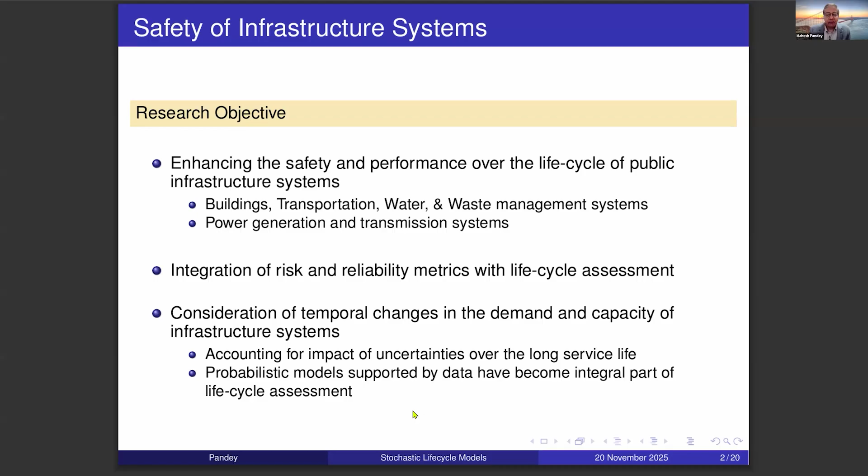Data is always, as you know, an important element in any assessment involving probability and statistics, both in the design stage and maintenance stage. We use these probabilistic models and methods which are calibrated by real life data. So two steps are there: in the initial design, setting the requirements for initial design, developing codes and standards, we use reliability based methods, which are very common in civil engineering systems of all sorts now. And we need data regarding the service loads and material properties and interactions and so on.

More importantly, in the long life infrastructure system, we also now look at the vulnerability to degradation processes. What can go wrong over the lifetime. Condition monitoring provides the data. So how do we synthesize this data in the assessment and support the inspection and maintenance planning decision? And life cycle cost optimization is also a conventional tool nowadays to find the right strategy.

So in summary, what I wish to say is that probabilistic modeling and statistical methods are natural tools for dealing with this problem of safety and functionality of infrastructure system. And I always remind the researchers and the user that it's an information intensive process. I mean, it's not that we can do in a casual sense.

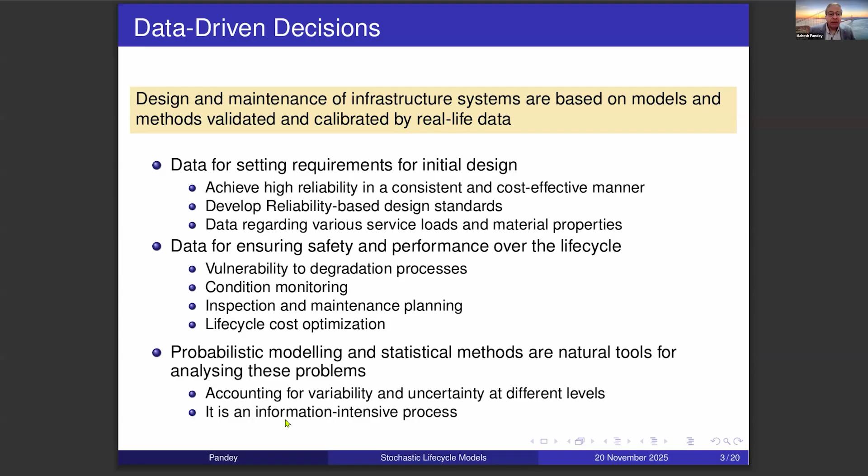So a basis for any, you can say, the skeleton or the backbone of a life cycle assessment, at least the kind of research we do, is a stochastic reliability analysis model. And what I thought is just give you a conceptual flavor of it. The time is limited to go into all the details.

And on occasions, these loads could increase, demand could exceed the capacity, and then these interactions basically would lead to so-called damage and failure events. And we want to estimate the expected losses resulting from these events, so to speak. And of course, these models are calibrated with the available data and expert assessment. Once we set the baseline, then we could approach to optimize inspection and maintenance as a way to mitigate.

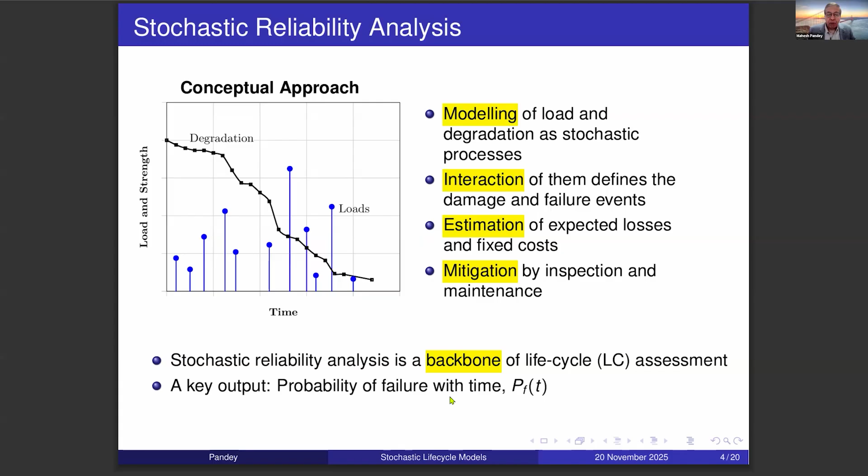So in summary, basically, I need this type of analysis which gives me a probability of failure over time for different modes of failures. It's not for single mode, different modes, different limit states, so to speak. So this is kind of the basic schematic of the method here.

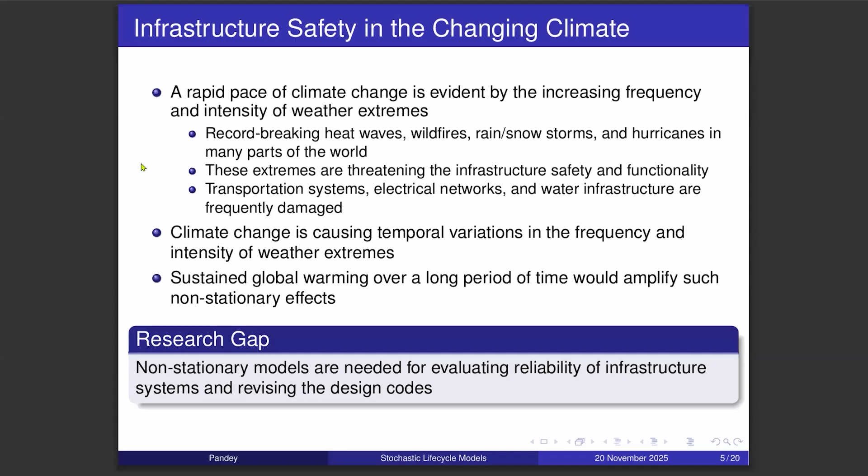Then the angle that I wish to present here in the research is on the climate change. And that is the concern also in Canada, where the climate change is at an accelerated pace as compared to rest of the world. And these changes are evident now by increasing frequency and intensity of extremes. It's a common headline nowadays in the newspaper and media. You hear about record-breaking heat waves in Canada now, rain and snowstorms and hurricanes and atmospheric river.

And of course, all these events are challenging the infrastructure safety and functionality. And in the front line, you have the transportation system, electrical networks, water infrastructure, and we hear the news about these systems being frequently damaged and disrupted. So as an engineer, what we make a note is that the climate change is causing temporal variations in frequency and intensity of weather extremes, and the sustained global warming will continue to amplify these effects. So key research gap is the non-stationarity.

All the existing design codes and standards implicitly assume that we're dealing with the stationary climate. So all the load models that we use are essentially stationary processes. So the research gap that we identified is that non-stationary models are needed for evaluating reliability of infrastructure systems, and that work should also be able to support revising the design codes. So this is the angle that we are pursuing in the research in Waterloo at the moment.

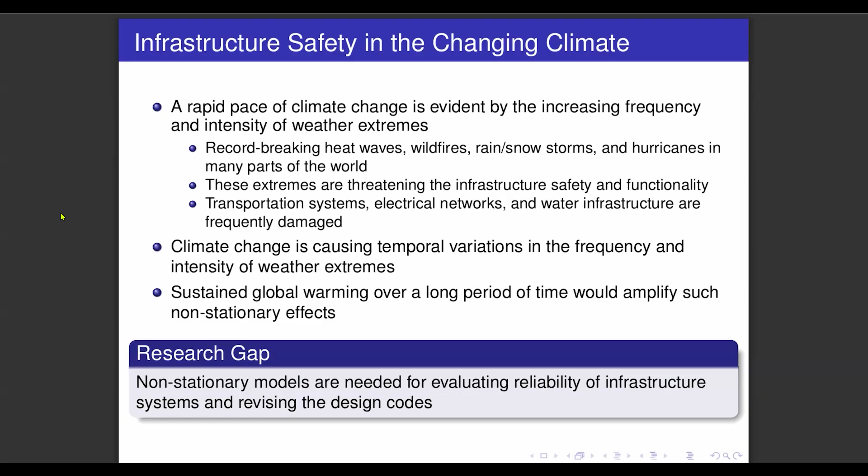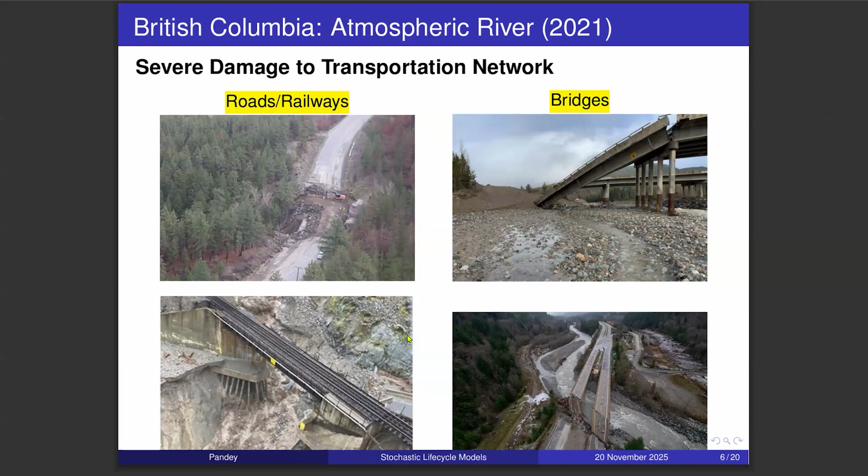Either they just had a slope instability, landslide, washout, scouring, all sorts of phenomena were happening because of the gush of water. So the bridge superstructure was standing perfectly fine, but just the approach was not available, and that made it unusable for long period of time. So safety of infrastructure system is what we are focusing on,

and also a bit of inspiration from attending the last DARE seminar where discussion was on the earthwork. We began to look at how the climate change will affect the earthwork in the transportation system. How do we bring climate change effect into modeling? And this is also of interest now in Canada, especially after the large scale destruction we saw during the British Columbia flooding event. Naturally, climate change has two most dominant, most visible effects: in the temperature, heat, and precipitation, water. So either we have too much of these things or too little.

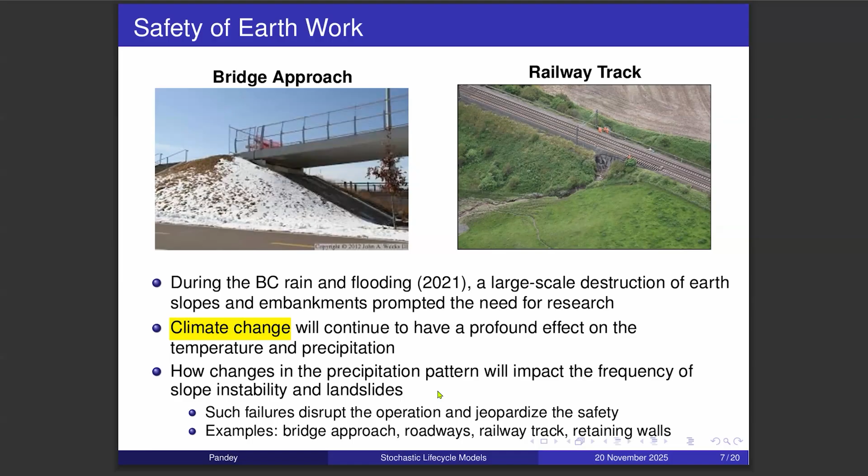So the question now is how changes in precipitation pattern will impact the frequency of slope instability and landslides. And because we know these events are very, very disruptive, needless to say, the justification is there to look into this research. So what I have done in this seminar, I'm just presenting a more conceptual approach. I thought that would be worthwhile discussing, debating, as opposed to going into all the numerical details.

So what we have thought of is a kind of an integrated approach in which we look at the climate change module, you can say, climate change processes, how they feed into the reliability of a system, based on the mechanistic model of failure. And of course, then we look at the time-dependent changes through modeling degradation processes. And all these three elements then feed into life cycle risk analysis or cost analysis, which will follow at a later date.

So we started a pilot research project because, to have a buy-in from stakeholders, we want to demonstrate that we can logically integrate all these modules together and provide some meaningful answer which is of practical use. Otherwise, as you know, we academics are always accused of doing a lot of textbook stuff, which may have limited practical application. So this is the intent of the ongoing project, and I wish to share some of the thoughts and ideas and where we are. So this is work in progress.

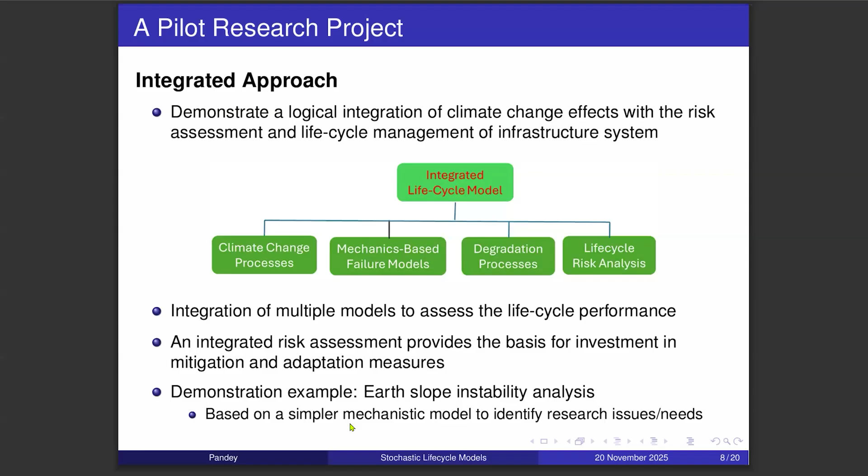So integration of multiple models is the objective, and in the end, our thinking is that this integrated risk assessment will provide the basis for mitigation and adaptation measures by our National Research Council, Infrastructure Canada and other agencies. So as a demonstration example, we started working on the earth slope instability analysis model. First we thought, let's start with a simple mechanistic model which we can solve analytically, integrate all the elements together, demonstrate the feasibility, and then work with more complex issues.

So of course, the first issue is always the modeling of the climate change effect, especially on precipitation. So what we have done is we looked at the ensemble of 26 global climate models coming from the latest phase. The first plot that you see is the projection forecast from 2020 to 2100 of the annual maximum precipitation, basically the daily amount in Toronto, Ontario, just as an example.

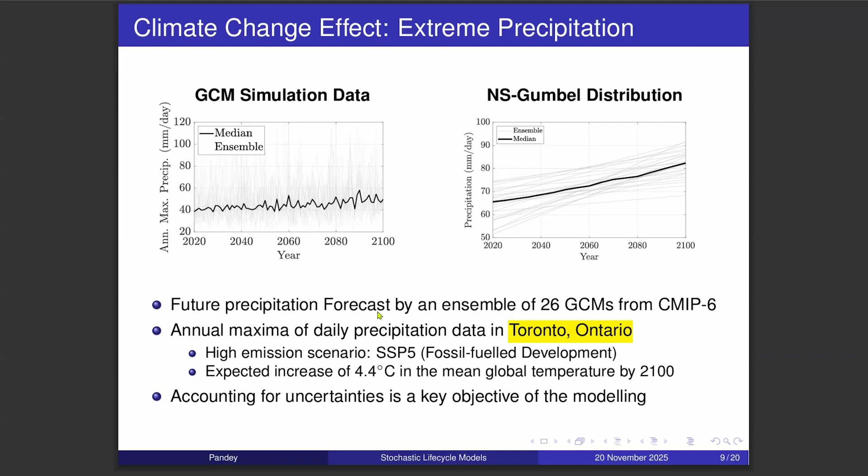So you could see these GCM models have a lot of noise, a lot of uncertainty, the so-called internal variability or chaotic variability of the model, as well as the model uncertainty and many other factors that contribute to it. So how do we capture this uncertainty by a more concise, parsimonious model? That's where the probabilistic analysis helps. We could basically use a non-stationary Gumbel model to begin with. That's a simple model, and now we have a representation of all the uncertainty in the model, and this could now be input to the analysis.

So we also looked at the work on non-stationary shock processes, where we have more control on modeling the frequency and intensity of processes as separate elements. A lot of work we have done here using the non-homogeneous Poisson process, and also looking at non-homogeneous birth processes called the linear extension of Yule process. Stochastic modeling of practical problems is our niche expertise, so we spend a lot of time doing these things. The non-stationary components are both frequency and intensity, and we can also include the dependence.

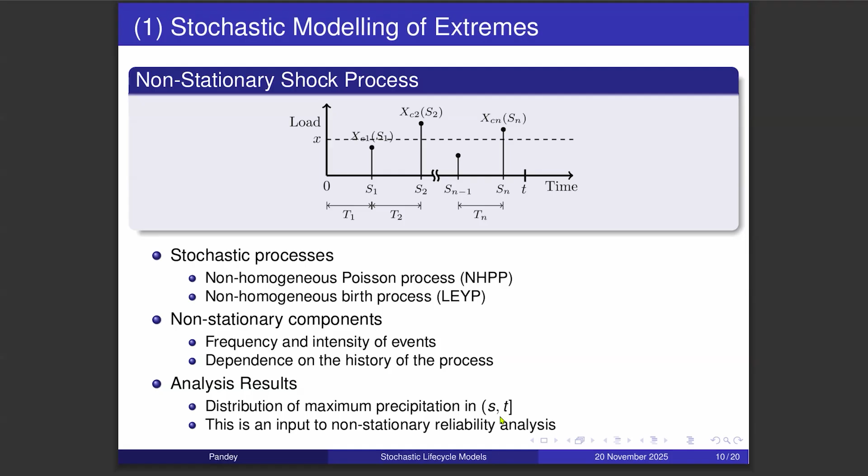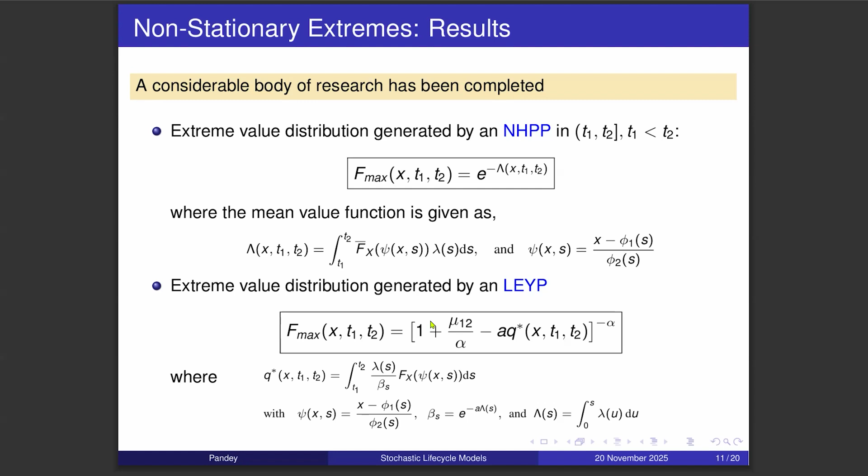But the nice thing is the final output is essentially a distribution of maximum precipitation in any given time interval. These distributions and analytics are manageable. We can get them in a more analytical form, which makes it easy to do subsequent simulation and all those things. So here are the results for the NHPP and the LEYP model, and I won't go into detail. All the publications are referenced at the end of the presentation that you can refer to.

So now coming back to the earth slope instability problem, what we have done is a probabilistic version of the infinite slope limit equilibrium method, a standard model in geotechnical engineering. We look at the Mohr-Coulomb shear strength model and calculate the factor of safety during the rainfall. On the right-hand side you will see a rainfall event 50 hours long, for example, with total cumulative rainfall of about 120 millimeters, and this is the pattern during that event. The dark line is the calculated factor of safety of the slope, which becomes less than 1, which means the slope becomes unstable for this pattern of rainfall, and that leads to failure.

So rainfall infiltration is also right now the simple model, I said, just for illustration purposes. So what this model does, it gives us the computation, it gives a conditional probability of failure for a given total rainfall. So by varying the amount of total rainfall, we can calculate essentially a conditional probability curve that is called the fragility function.

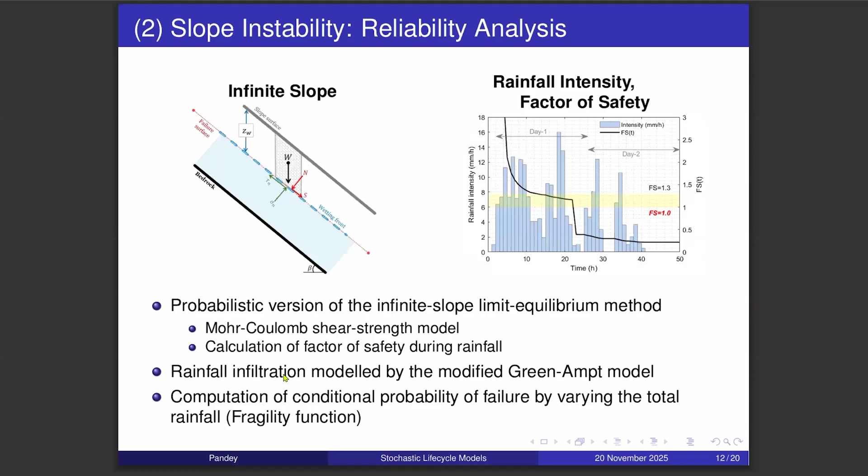So in terms of how we use this in a practical sense, we face another research problem to be addressed, and the problem is that for slope stability analysis I need high resolution rainfall data, an hourly basis rainfall pattern or maybe even less. And naturally when we look at the climate simulation data that are available, they are not at such a high resolution. At best we can get the daily basis resolution. So the question is then how do we connect the two?

If I just use the daily basis data, we will not be producing a correct result for the slope instability analysis. So that becomes a kind of research problem. How do we reduce or convert low resolution data and infer a high resolution rainfall pattern from it? So there are, at least in a stochastic world, two possible solutions. We can look at the clustered Poisson process model, and second is the breakdown coefficient method.

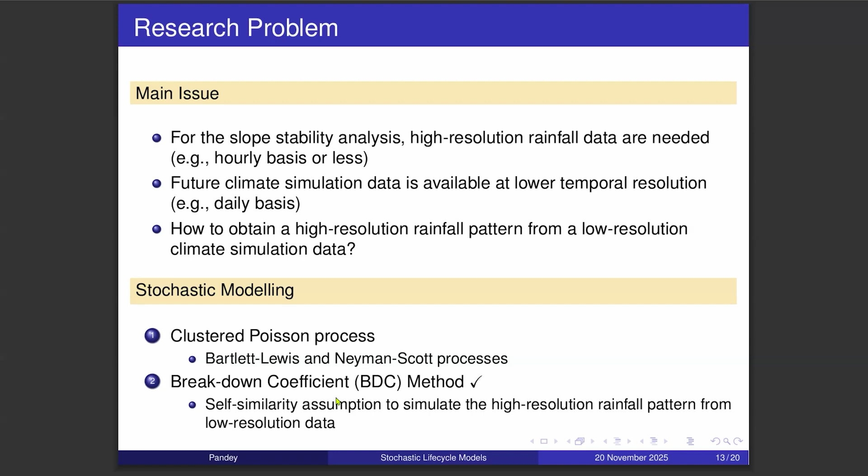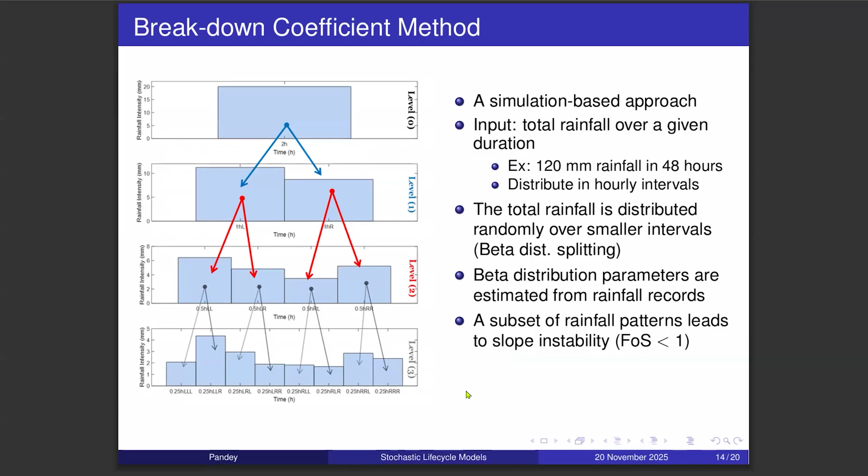So we have used the breakdown coefficient method, and again we have done quite a bit of work just completed now, where the idea is that we look at the total rainfall over a given duration and randomly split it into different time slices. It's also called the beta distribution splitting, and this is based on the idea of what we call statistical self similarity in the fine temporal scale and the larger temporal scale. So again that method seems to be working effectively.

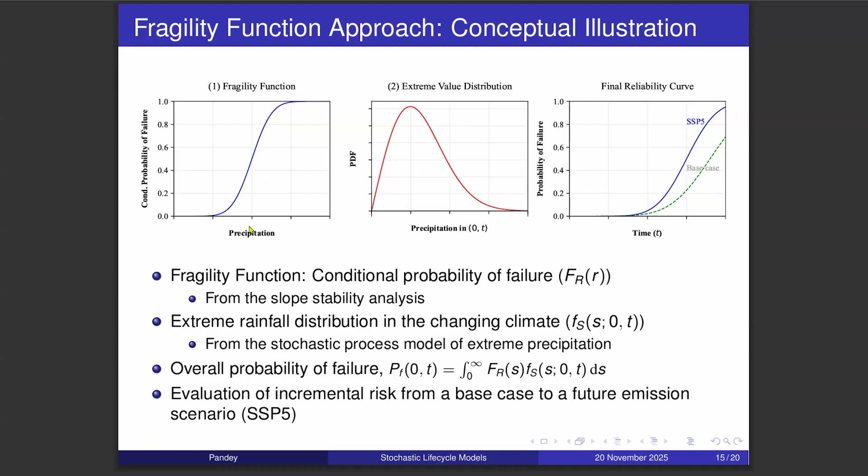Combining the two will give us the final so-called probability of failure curve over the future time horizon, over the life cycle. So we will have this kind of calculation done for some kind of base case situation, and we can look at the second curve for some future emission scenario, and that would give us the measure of incremental risk. So this is sort of where we are at. We have completed all this modeling work and are just running the calculation and example right now. So I apologize for not being able to present a more realistic example, but this is where we are at.

The last element would be degradation modeling. Again, the challenge is, earth slopes especially have wide ranging degradation processes, and mechanistic modeling tends to be complex and uncertain. So we'll have to see how we manage those challenges. In terms of stochastic modeling, it is always feasible at a high level. We can look at the Markov chain, discrete condition state.

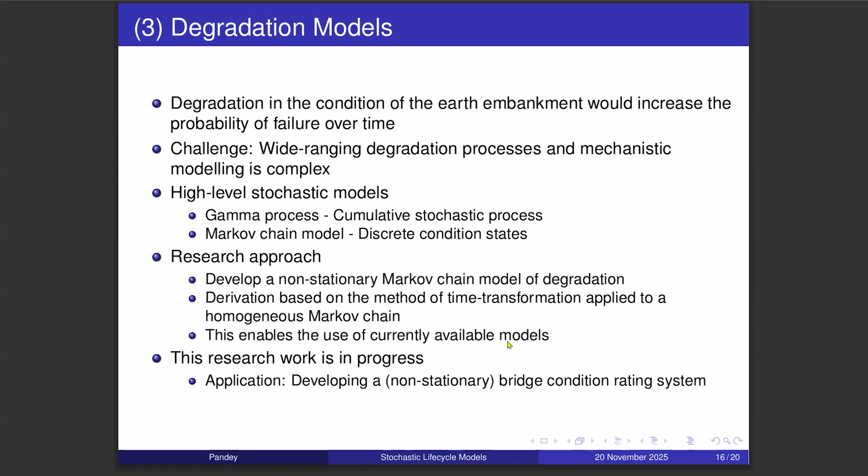So right now the project we have is looking into a non-stationary Markov chain model of degradation. And we are focusing on the time transformation method, which is a more concise and parsimonious way to convert an existing Markov chain into a non-stationary model. And this way we can use the currently available chain model. And we are applying this to the bridge condition rating system that our transportation agency is using.

So this brings me to the conclusion of this overview of ongoing research in Waterloo. The non-stationary nature of climate change is expected to intensify. This is sort of the basic premise. And we are looking into safety of earth embankments as a pilot research project and applying all these stochastic life cycle research and analysis methods. We have a number of elements in the research program, looking at the modeling of extreme precipitation or other extreme processes, and probabilistic analysis of the system under concern.

So here we are looking at the slope instability problem, and I think the fragility function, to me, as a proposal which comes from the seismic risk analysis world, is a convenient way to integrate all these effects together. And in terms of the path forward, we are just getting into more detailed models of embankment failure.

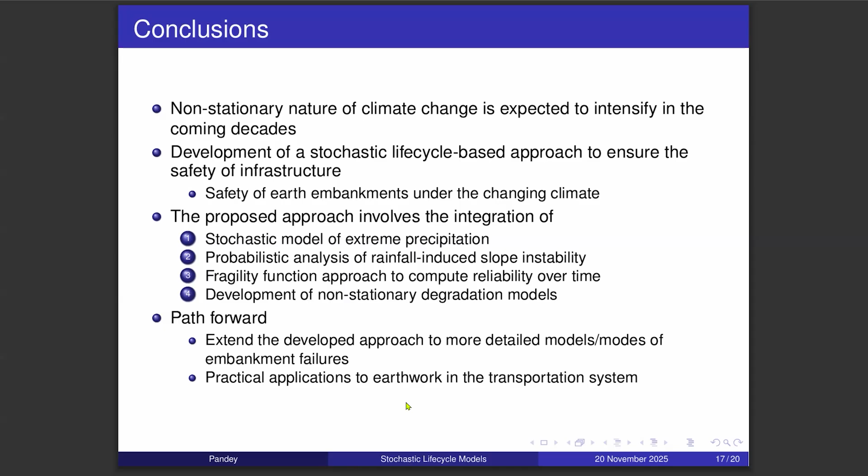What I presented is a very simplistic view. As you know, there are many other methods and mechanisms that need to be considered. And more importantly, our students are now starting to work on practical application to earthwork examples in transportation systems in Canada. And I hope to report those results in the coming days.

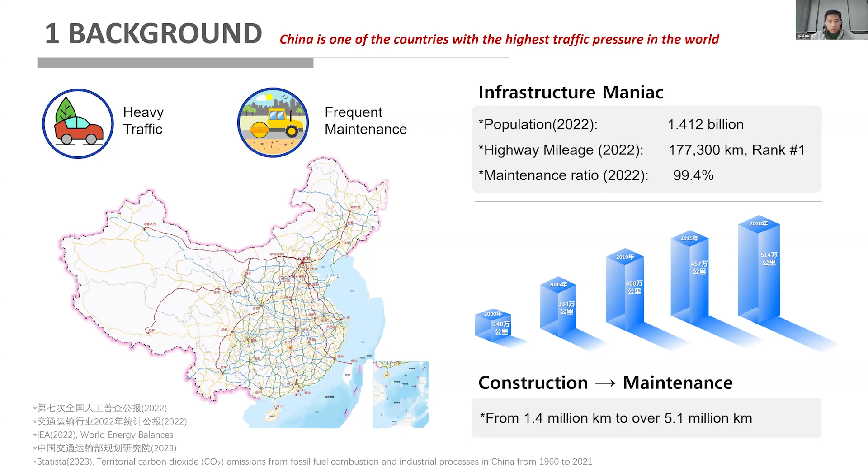So the maintenance of massive road assets faces huge challenges. We can see some cases. For example, Shanghai is a very big and very old city in China. For the Shanghai city expressways, the longest service time is already more than 29 years, and the average service time is over 25 years. For the highways, the longest service time is over 35 years. All the road facilities are very old, and they are getting older and older.

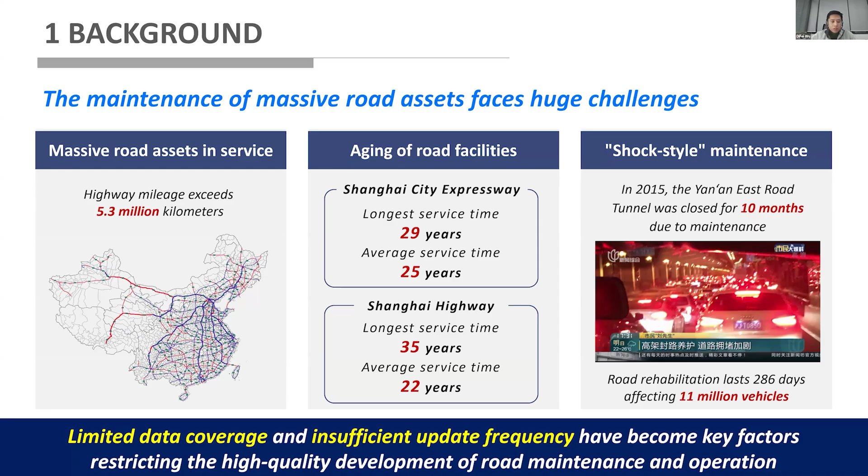Let's see the maintenance for these expressways and highways. We have done lots of maintenance. In 2015, one of the expressways was closed for 10 months to do shock-style maintenance, which influenced transportation in Shanghai a lot. So under this condition, we think that limited data coverage and insufficient update frequency have become key factors restricting the high-quality development of road maintenance and operation. So the primary thing for us is to capture data, especially road performance data.

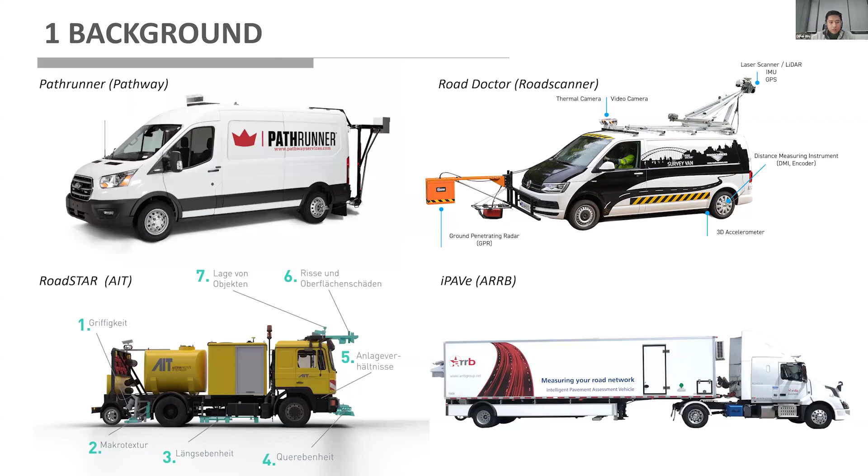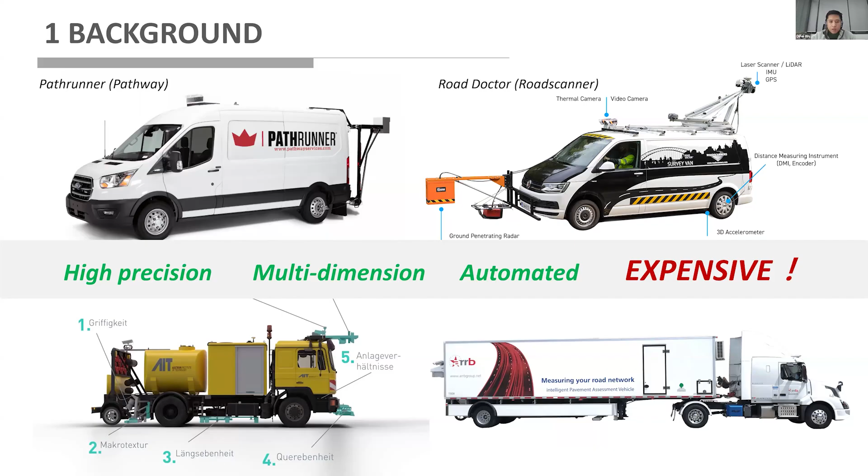Actually, in the world, we have lots of techniques and approaches to capture those data. For example, here shows the four typical detection equipment in the world, like the PathRunner, the Road Doctor, the RoadSTAR, the iPAVe. They are very big and high-precision vehicles. But all of these detection vehicles, although they have high precision, they can detect the road from multiple dimensions, and it's automated, but they are all expensive.

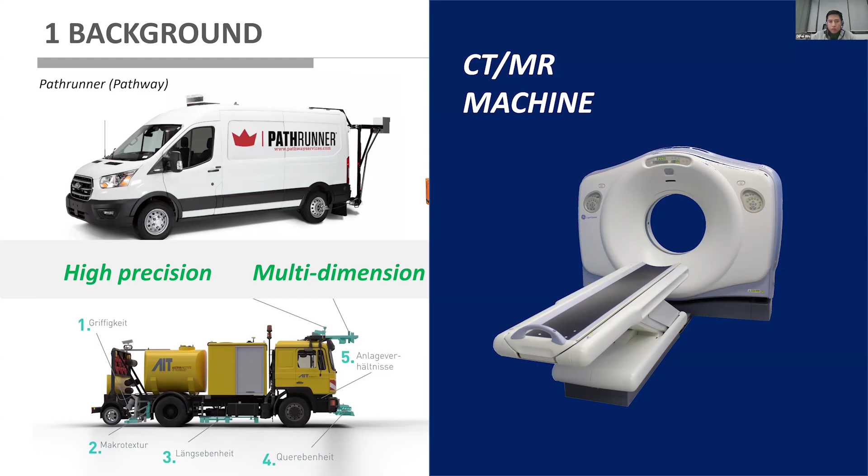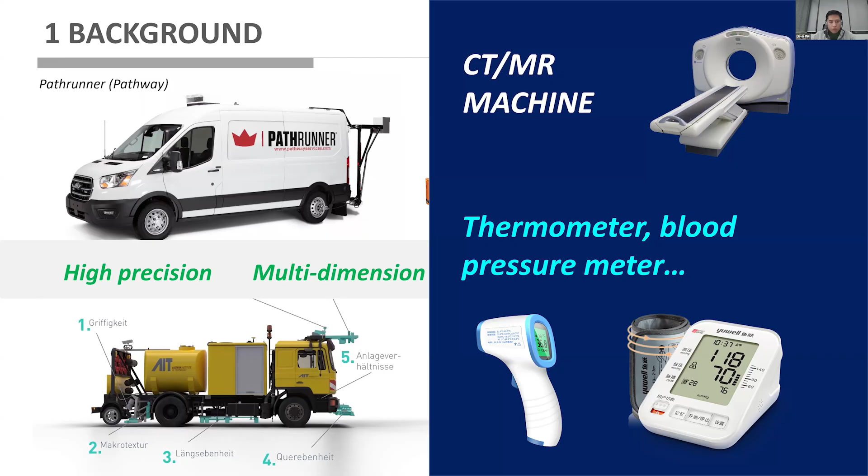So actually, for us humans, it's just like doing CT or MR examinations. So it's very high precision and very expensive. But for us to do the routine maintenance, actually we want to add more techniques, just like a thermometer or blood pressure meter, this kind of lightweight and cheap method to do the examination. So we think that road infrastructure also needs such techniques.

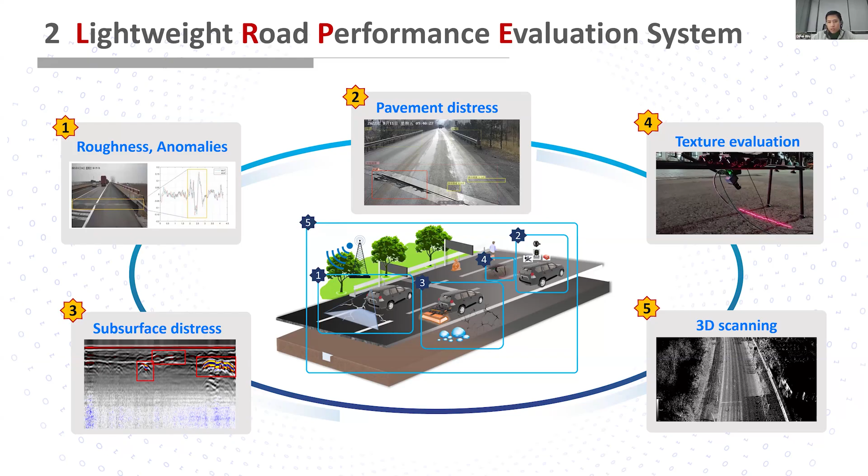So under this background, the first thing we did is we spent over 10 years to develop a lightweight road performance evaluation system. So in the second part, I will introduce this system. This system allows us to capture the performance data from different aspects like road roughness, anomalies, pavement distress, texture evaluation, and subsurface distress. And we do some 3D scanning to get the information of all the road facilities. So that's a lightweight system.

And this system integrates cutting-edge sensing, AI, 5G communication, BeiDou positioning, and other distributed technology to achieve digital oversight of the entire maintenance process. So here this figure shows the scheme of the system we developed, and it has some modules there. We can see the cameras, the GPR module, the positioning module, and we have an edge computing server there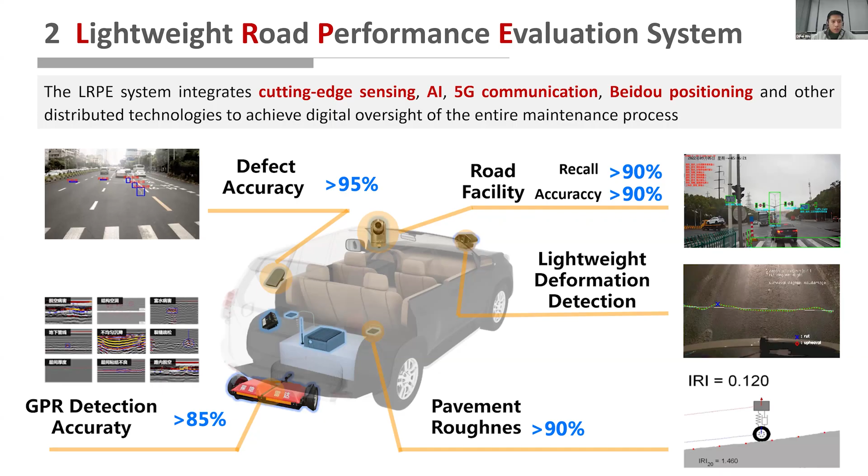to do the computation. And for some cases, we can apply a laser system to project a laser on the pavement surface, and we can identify the pavement deformation based on the shape of the laser. So that is the scheme of this lightweight road performance evaluation system. It's mounted on normal vehicles. All the sensors can be assembled on demand, and the equipment operates fully automatically without human intervention. Almost any vehicle can be used as a detection vehicle.

And then we can see here a small video. So maybe there can be some time delay here.

Here shows a video. We have this equipment mounted on the top of a normal vehicle, and we have a camera there to capture the image of the road surface, and we also have some sensors mounted on the vehicle to capture the vibration data to get the pavement roughness information. So that's the video of this lightweight road performance evaluation system.

Okay, so now we go to the algorithms. The first algorithm is to inspect the pavement distresses, and in this study we have proposed a road ID algorithm based on a deep neural network to automatically identify the distresses and to quantify the size of each distress, like we can see from the images. To develop this algorithm, we have marked more than 5 million training samples and over 1 million distress detection cases.

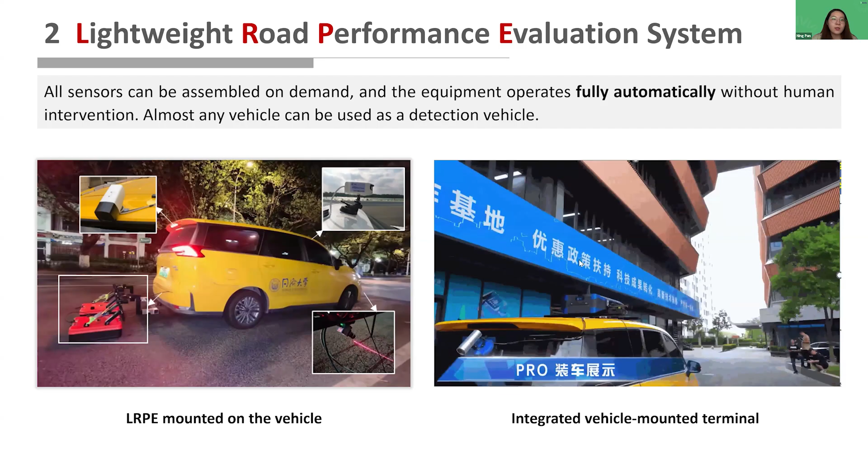Sorry to interrupt you, Difei. There might be some delays. We are still looking at the videos in your slides. Okay, so I'm gonna stop this sharing first. I'm gonna move to the next slide. So can you see, I have already moved to the next slide. Yes. Can you see the next?

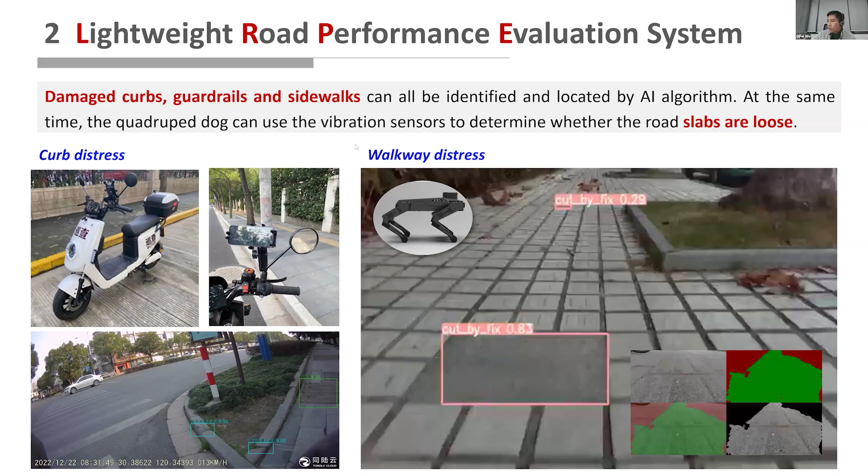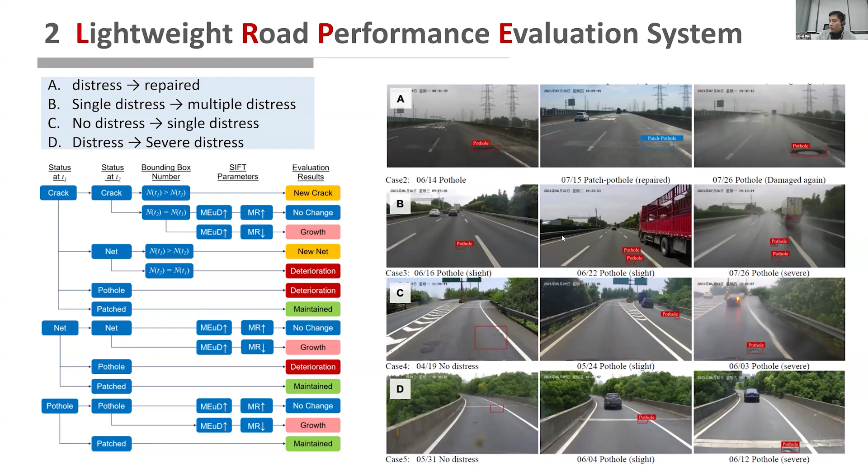Okay, I will skip this. I will skip this slide. It's a video and may cause some time delay.

So in the former slide, we just introduced some technologies based on the image. And in this slide, actually, we have used vibration technology. We collect the vehicle suspension vibration information through distributed sensors, and then we establish the mathematical relationship between the suspension vibration and the international roughness index through PSD analysis.

So we think that when the road is very rough, that will cause a very large vibration on the vehicle. So we capture the vibration information of the vehicle, and then we can evaluate the pavement roughness level based on the vibration data. So that's the core technique we have studied in the past 10 years.

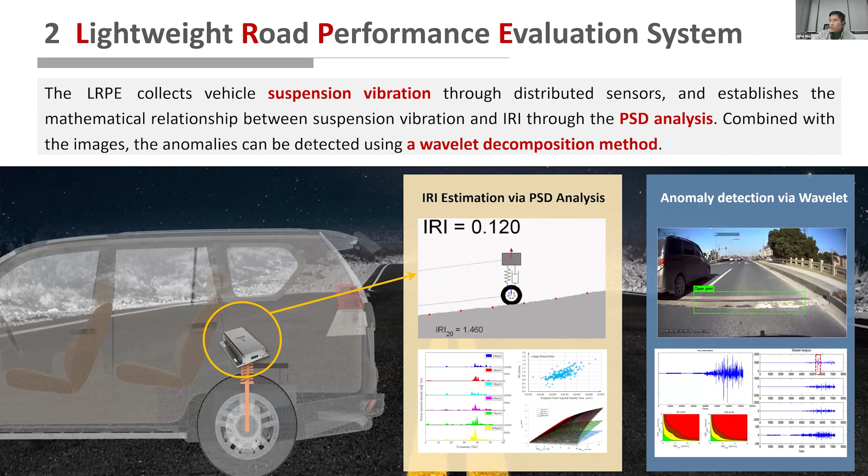And we know that for the pavement surface, we should not only focus on surface distresses like cracks or potholes. We should also focus on deformation like rutting, raveling, just deformation distress. But actually, this type of distress is very difficult to measure or to detect.

In traditional ways, researchers use LiDAR technologies or laser technology to detect the profile of the pavement surface, but they are expensive. So in our system, we use a low-cost rapid detection method where a laser just scans on the pavement, and we can see the green line here.

If the pavement surface is very flat, then that will be a straight line. But actually, we can see it's a curved line. So we can identify the deformation position based on the shape of this laser stripe. So that is a lightweight technique to measure the pavement deformation.

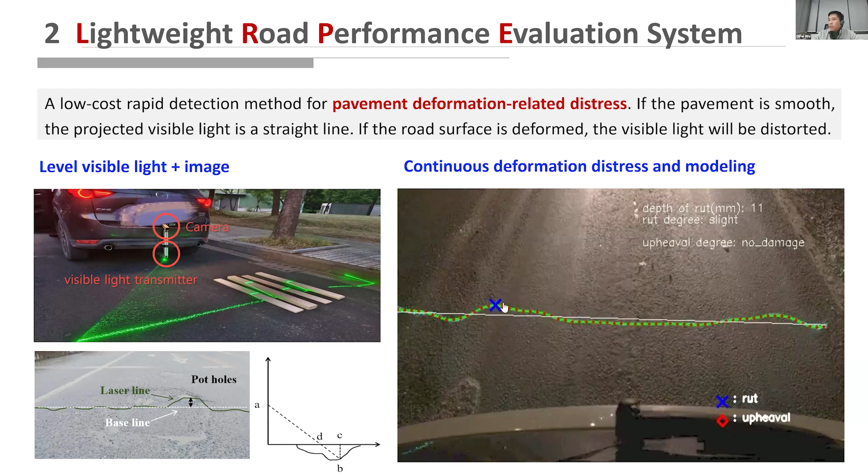Okay, so in the former slide we introduced some technologies to detect the surface distresses. And we also developed a system utilizing GPR, ground penetrating radar, to capture the subsurface information to detect subsurface distresses like poor bonding, settlement, cavity, crack, and water just under the pavement. It is also very important for us to do the maintenance.

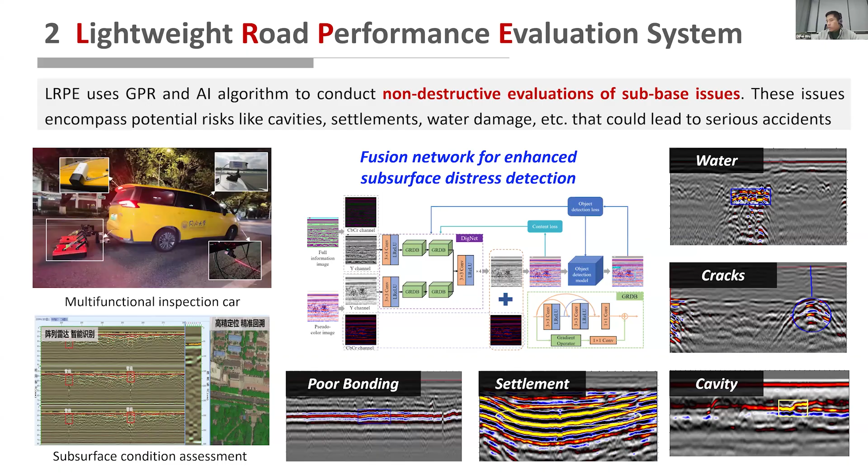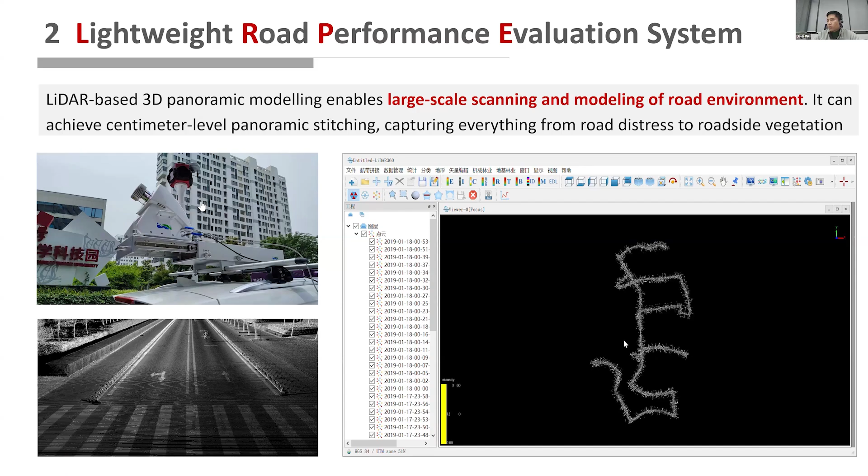And this technique is based on LiDAR technologies. We use LiDAR technology to capture the 3D geometry of the road environment. So I will skip this. Okay, so that is the result. We can get the 3D geometry information of the road and the facilities beside it, and also the lines and the traffic signs on the pavement. But this technique is very expensive and very high precision.

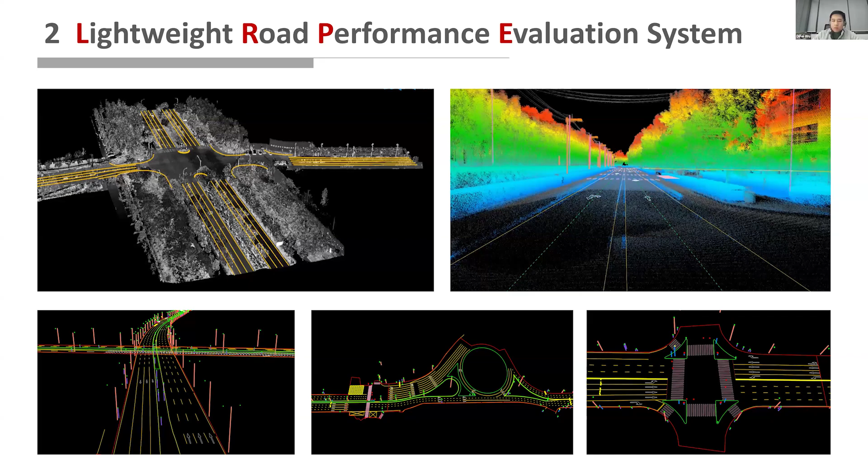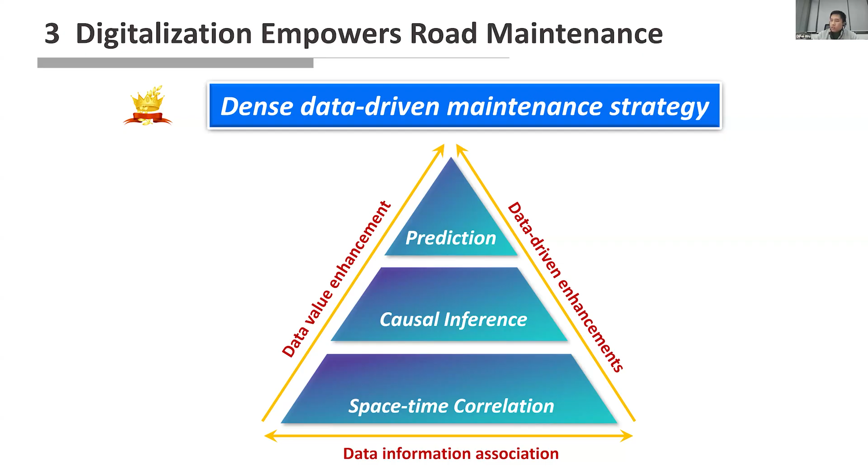So I will skip this. So based on the data we captured, I'm going to show some interesting findings. Okay, so let's see some interesting findings based on the captured data. So first, we can see the first case. We can see some frequent distresses.

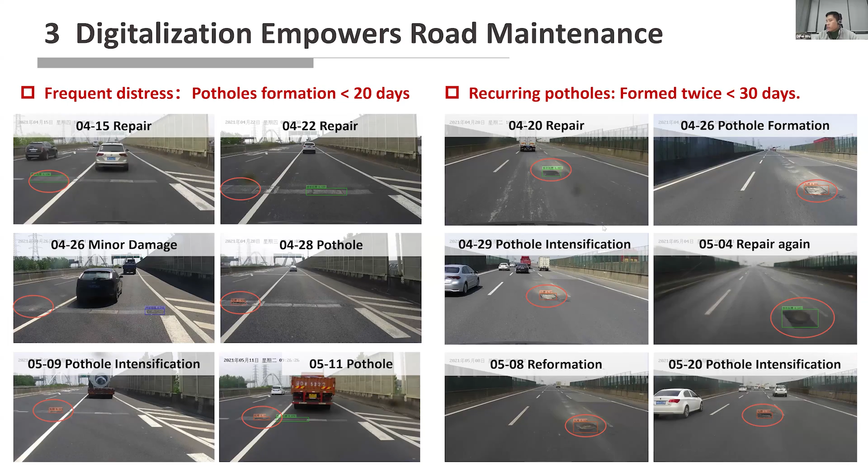And this is another case here. It's a repaired pothole, and just 6 days later, this repaired pothole becomes a very severe pothole. Then after maybe 10 days, it's repaired again. But then after 2 weeks, the pothole formed again. So based on the data, we can show how the maintenance and the traffic influence this distress.

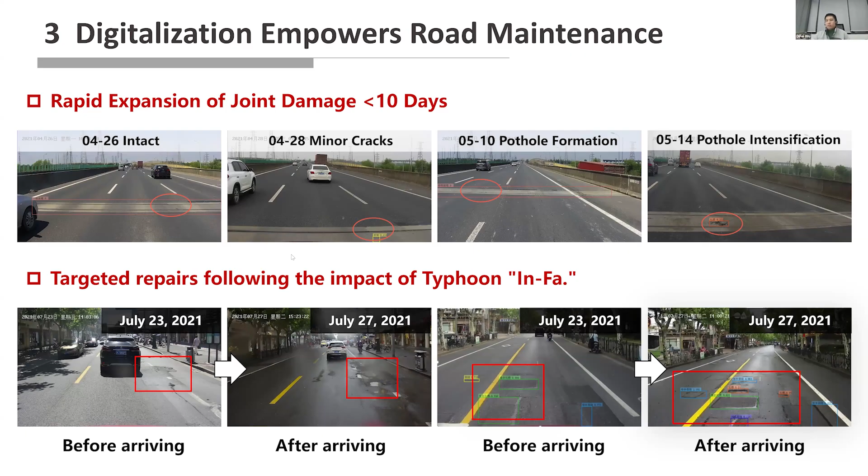We find that the major cause of this surface distress is the subsurface condition, the subsurface defects. The GPR result shows uneven subsidence here. So that's the main cause of this pavement surface deterioration. And this is another case here.

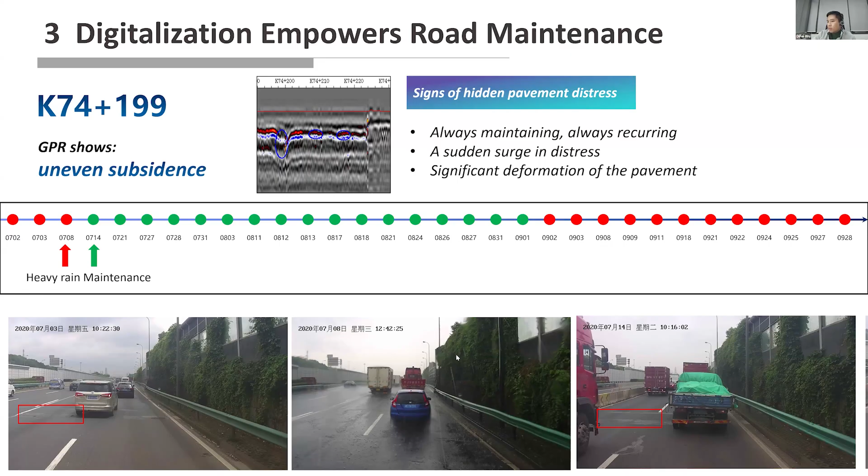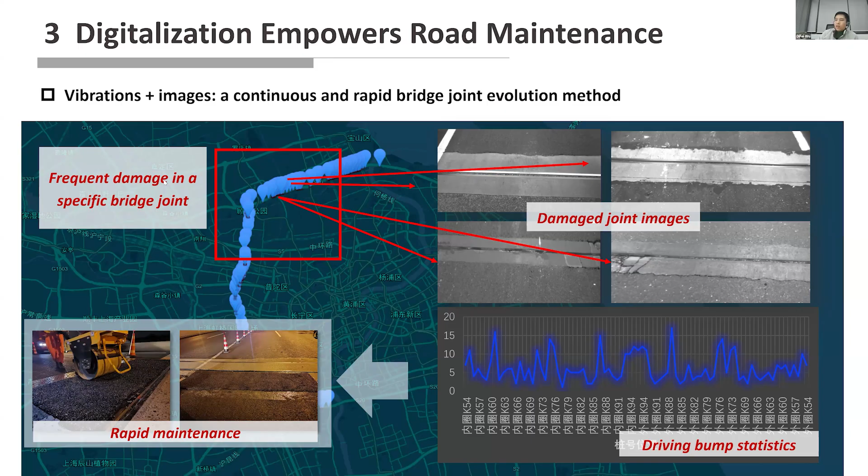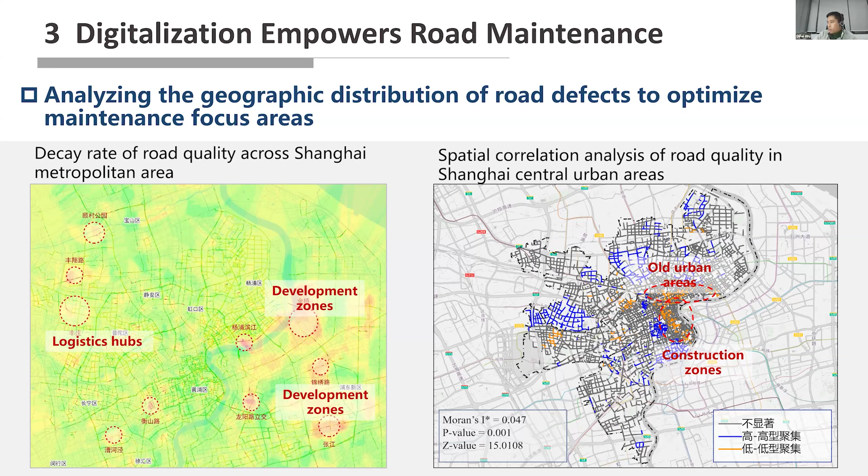And here, this is a downtown region in Shanghai, and we can see the construction zones, the old urban areas. In this region, the pavement performance deteriorated the most. This is another distribution of one district in Shanghai. The distribution result can help us with maintenance decision making.

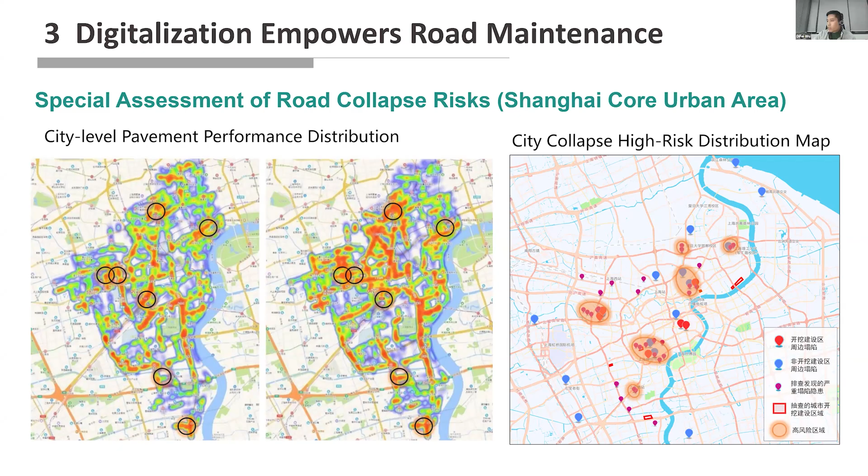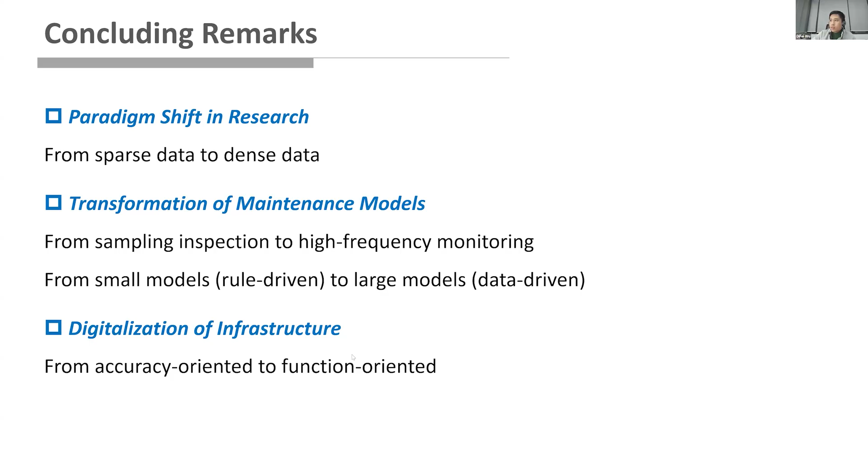So here is the conclusion. With the studies we have done in the past 10 years, we have transformed data capture modes in China from sparse data to dense data. We have transformed maintenance models from sampling inspections to high frequency monitoring, from small models to large models. And for the digitalization of infrastructure, we transformed from accuracy oriented to function oriented. That's the main conclusion of this study.